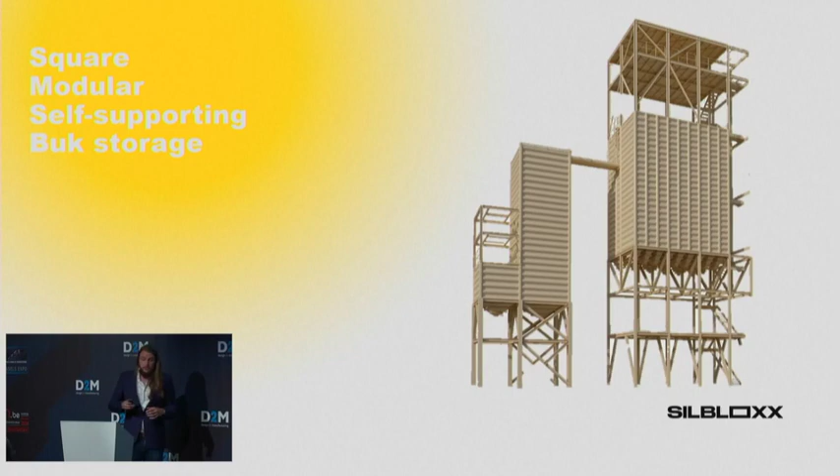The stackability of these panels allows for efficient transport. As we have panels that are only 1 meter in height, 5 meters in length, they can even fit through a door, so it's a very efficient transporting solution. The modularity allows for easy assembling, such as a Lego kit or an IKEA closet. You can build these silos very easily.

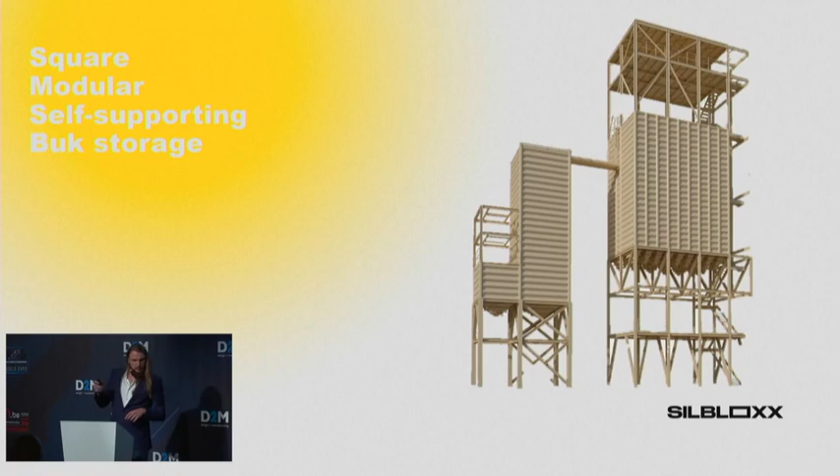One, if not the most important part, is a hopper. The hopper we have in two flavors: a square hopper and a circular hopper. The circular hopper is based on a patented technology by Silbloxx that allows the material to flow evenly. That creates a sort of FIFO, first in first out buffer, creating an even flow in your silos.

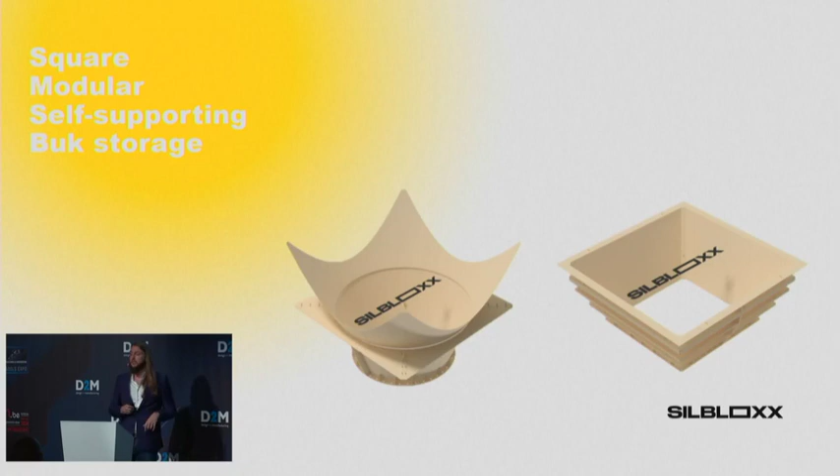Now, the digitalization trajectory we had at Silbloxx was envisioned a year ago to create a high-tech production site, as well as an innovative sales solution. So we did the digitalization on three aspects: sales, production, and after sales. The first aspect we took was the sales digitalization. We have a slogan, the ease of doing business, and we embodied this by creating a solution where you can easily configure and order your silos online.

Hello, we are Silbloxx, your partner in making silos for bulk storage all over the world. As part of the Briam Group, we have more than 30 years of experience behind us in accelerating the world's transition to responsible and innovative bulk storage. That experience has taught us that it's not easy to find silos that meet your storage needs. To ease this search, our team invented a renewed modular approach.

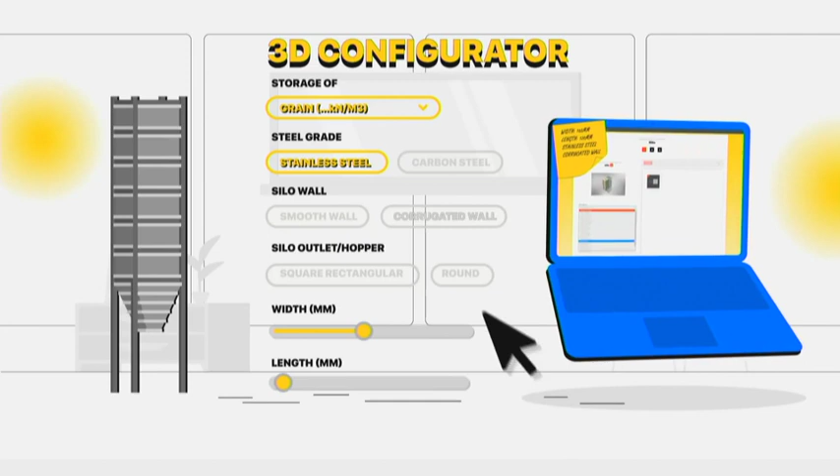From now on, you can design your own silo online using our 3D configurator. Moreover, you can follow the entire production process closely. We carefully pack your silo, after which you can come and collect it, or have it delivered to the location of your choice. All you need to do is assemble it, which is easy using our comprehensive manual.

Need some help? We will be there. Is your business growing? Thanks to the modular design, your silo simply grows with you. All you need to do is order the extra components or recycle your current ones for a new project. It's good for the circular economy, and just the sort of innovation you're crying out for.

Silos have never been easier to order. Go to our website, silbloxx.com, and you can configure your own silo.

Here you can add all the characteristics you need, such as the type of product that goes in, the type of finish, and the size. You can create silo per silo to build a full silo block.

Once you've completed your silo block, you go to the next step and we create a 3D rendering of your silo. Once you've made an account, you can also download that 3D file.

You can add that file into your design project, be it in your CAD software or your BIM software, and engineer your solution around that silo, making for quick iteration and a fast design process if you need any bulk storage.

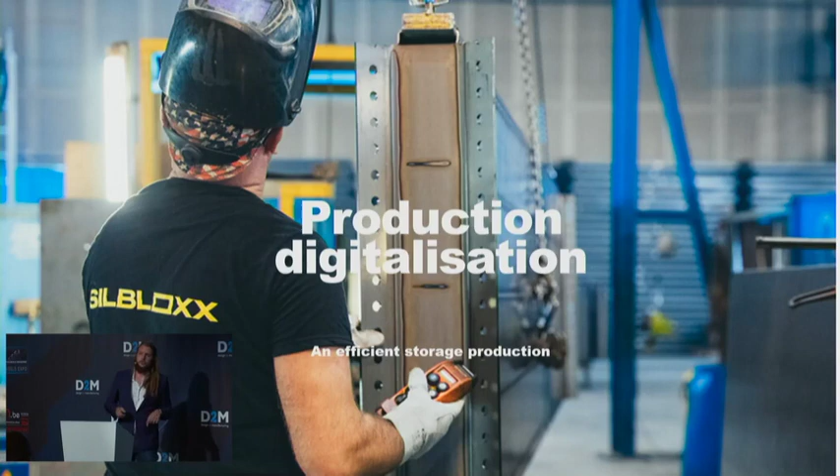That brings us to the second part of digitalization: production. About a year and a half ago, when Silbloxx started, it was paired with a full overhaul of our production site.

Our production site had grown naturally over time, which meant a lot of chaos and a lot of moving around. With the start of Silbloxx, we created a whole new layout that created much more flow.

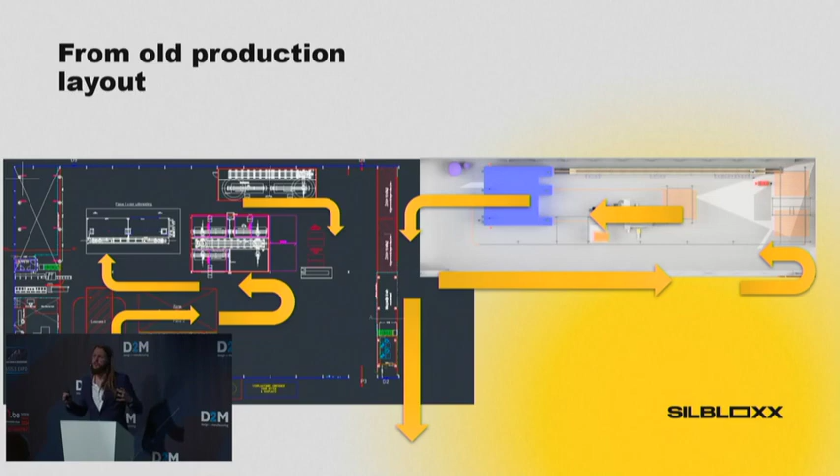We established a very circular flow, starting with incoming goods, where all the products are placed so operators don't need to search for them and they're kept in the correct order.

So operators can directly start working. The next part is our welding area, followed by our painting line, all in a similar flow to make things much easier.

The digitalization of the production layout began with the purchase of three new closed welding robot cells, each with two robots per cell.

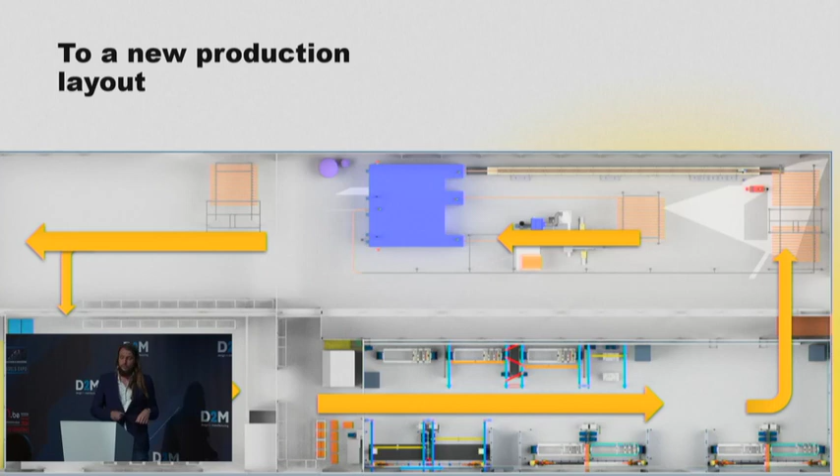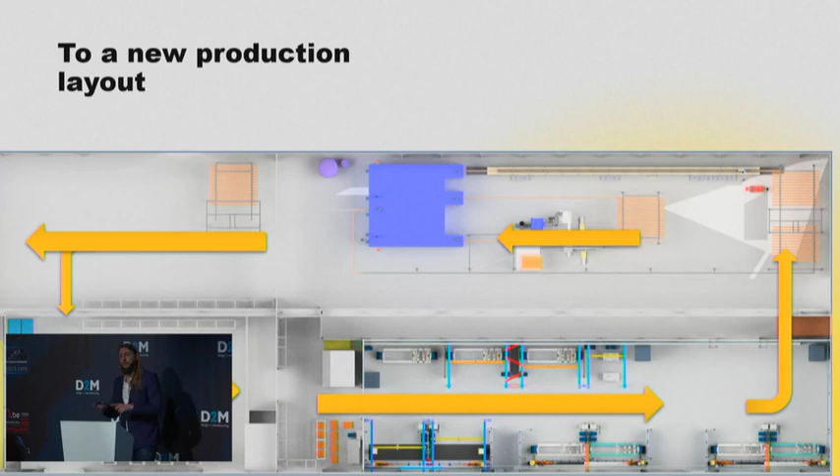So our production continues uninterrupted. Once adjustments are made on one robot, we can quickly copy them over to the other robot cells, allowing us to iterate quickly.

We also created a setup where we can easily change the layout of our panels. If you have larger panels, we can quickly adapt and change our robot layouts.

When we looked at our painting line, which was recently bought in 2018, we only made a minor investment there, elongating the end part where operators cool down the panels or elements.

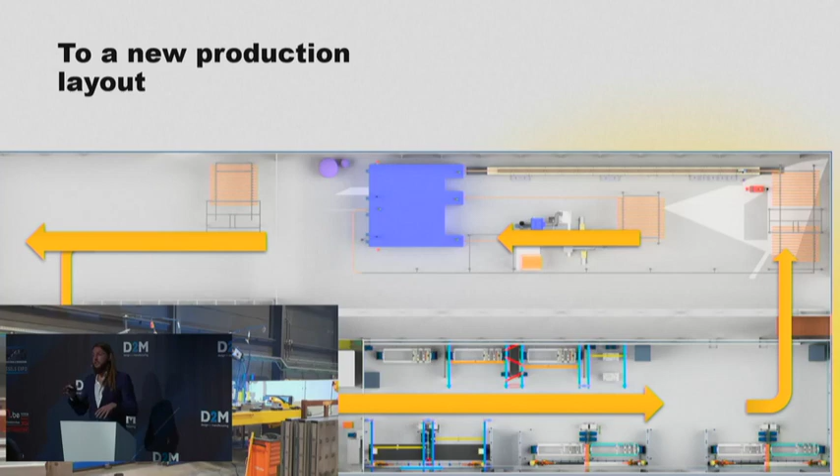This was done to take off the panels while always guaranteeing the safety of those operators.

In our digitalization trajectory, the first thing we needed was data - a lot of data, but more importantly, relevant data.

So we placed sensors all around the factory: pressure sensors to know when welding gas is running out, flow sensors to know how much consumption we have, and temperature sensors.

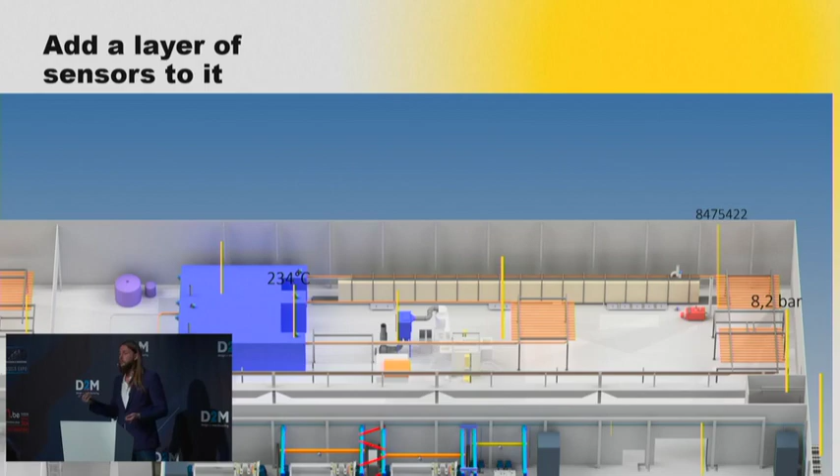RFID tags also let us know what products are where. Once we added all those sensors, we needed an interface for all of those data points.

So we standardized on OPC UA. In most cases that worked, and we did it for the sensors. Some of the older lines also had Modbus.

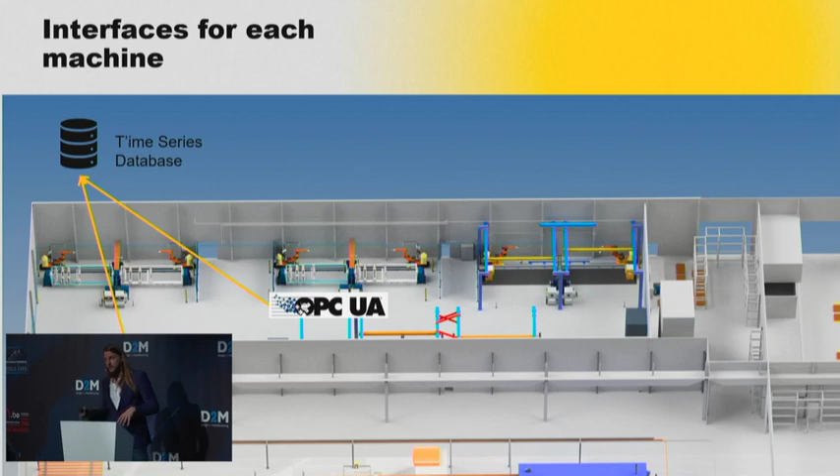The easiest part was for the closed welding robots. They had an inherent OPC UA interface, which allowed us to easily read and write our parameters to the welding robots, as well as a REST API giving us all the historical data at our fingertips.

The C-Gate layer on top of those robots made it easy to visualize all that data for a supervisor.

We also built some custom dashboards so we can see the status of a robot in a blink of an eye, see gas consumption which triggers emails to the right people, and also see some of our painting line data.

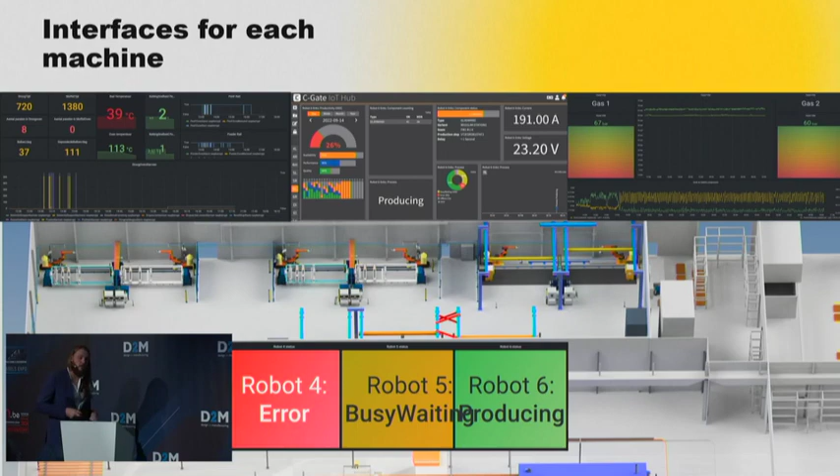All that historical data gives us a historical view and lets us generate business insights, so we can see OEE over time.

We can also see the greatest mistakes and errors happening, using a Pareto analysis to see where we can improve, feeding a continuous improvement cycle.

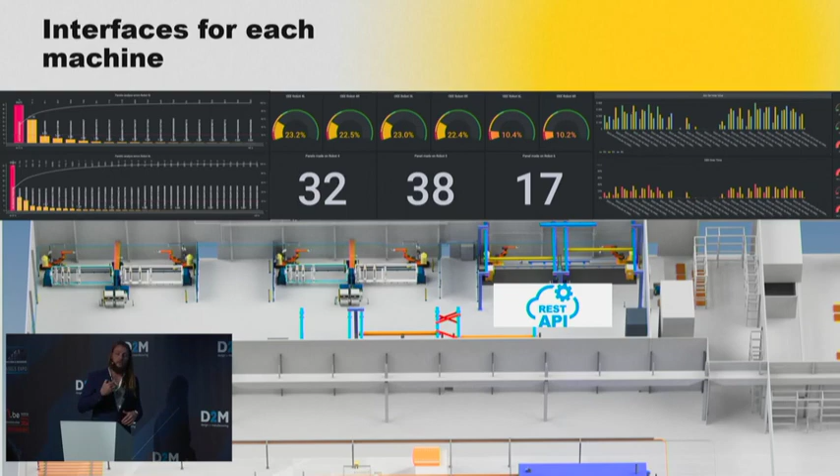Now, we had all our data points ready, we had all our historic data. We were looking into managing the whole of our production cycle. A lot of time went to the production steering, to the directing of the people. So we looked into a manufacturing execution system which can automate most of that production steering.

It's important for us that this manufacturing execution system, or MES interface, is multilingual, because we are a multinational company with a lot of different nationalities. We needed those instructions, standard operating procedures, and so on, in the native language, so that they are much easier or better understood.

It was important for us as well that the data we collected was enriched by the MES layer, be it by time or other aspects, so they can produce KPIs from that, be it OEE or throughput time, and as well feed a continuous feedback loop back to our calculation for better product calculation, and to our production for continuous improvement and striving towards manufacturing excellence.

It was important for us that the MES interface could also talk to all our machines, and that's why we standardized on OPC UA, because it's much easier to have one interface to connect with, so we can send our parameters from the master data straight into our machines. This allows us to have more business insights and to continually strive towards better production.

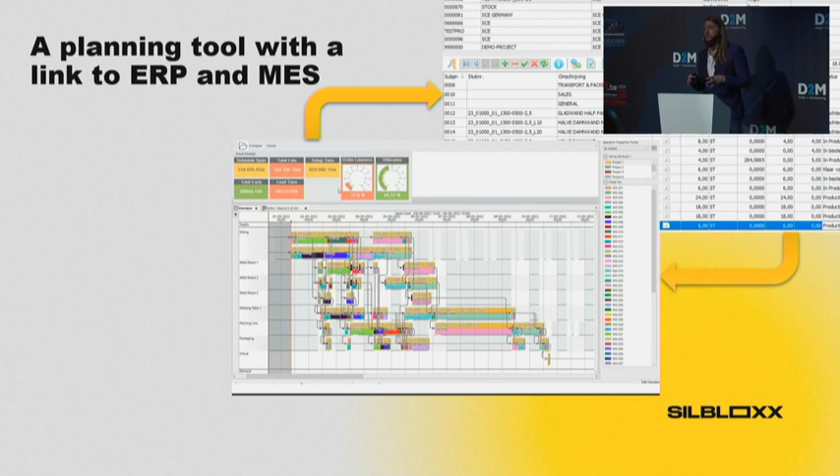As planning is very difficult, we needed a tool to have a high-level overview of all the projects, but also an in-depth planning of sequencing. This, linked to our MES system, gave us a real-time feedback loop. So we had production data to planning data, back to the ERP data, so they can have a high-level overview of our production data, know what is the work in progress, and know what are the next steps we need to make.

The planning tool allowed us also to have a strong overview of our stock flows, and also when we need stock. This allows us to have a closer relationship with our supplier, to have smaller stock movements, so that we can reduce our stock and go to a more just-in-time principle.

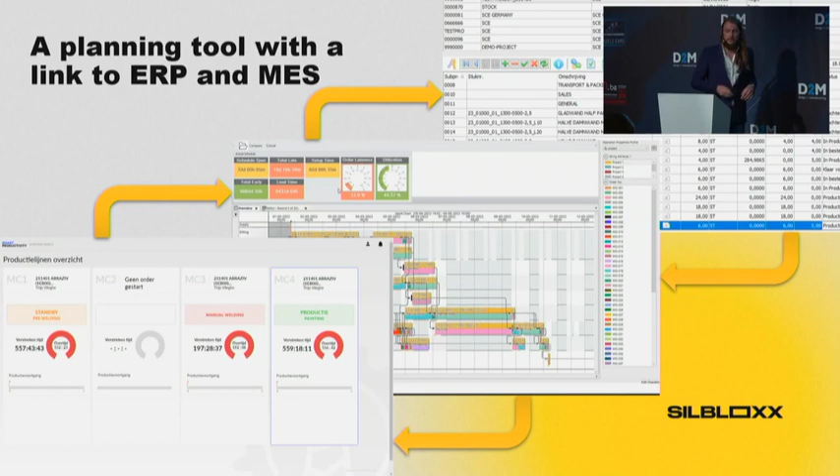Now, on a bigger aspect, we are looking at expanding Silbloxx's workflows. We're looking to expand in the United States and in Asia, but we want to keep the Lichtervelde site, the Belgium site, as this innovation hub for all technologies. So we're looking at the Belgium site to keep on innovating, to keep working on the newest working methods and new technologies, implement those in Belgium, and then roll those out to the United States and to Asia.

Now, on a third focus of our digitalization project, after sales, we wanted to help the customer as well. Once your order is done, it's been produced, it goes to you, you need to build it. So we want to help the customer by offering digital instructions. We want to make a kind of digital twin where you can work your way up with your building.

This will act as an interface which has all the data, be it production data, certificates, or notes from sales, into one interface, and then you can discuss with all the stakeholders around the same data points on what is needed, what is happening, where you need help, all in the same interface on the same data. Now, we had a lot of aspects, and these are still work in progress, but what are the next big steps, or what is the future to come for Silbloxx?